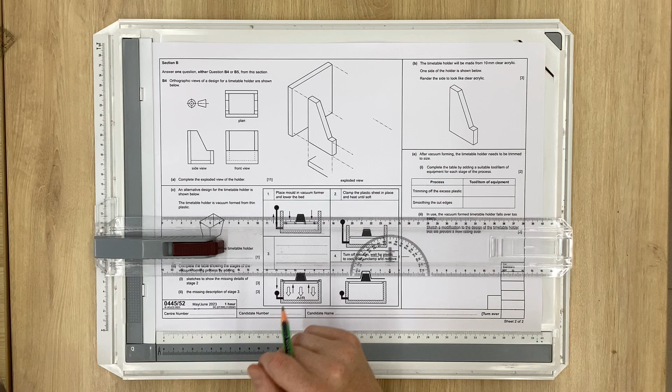The first thing I'm going to do, because it's isometric, is get my 60-30 set square, and I'm going to project all these lines across over. So I look at the base here, I see lots of construction lines, faintly first of all, going along, so each corner going over to the other side, and finally here.

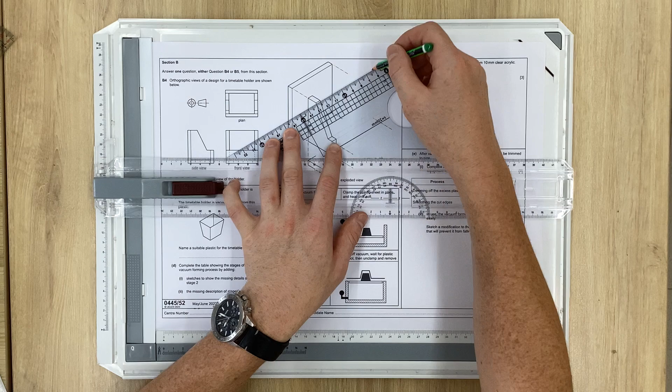With this now, I can line that first bit in. So we've got the bit there it comes to, that's the outside of there. So I can now work from these different bits to get the rest of it done.

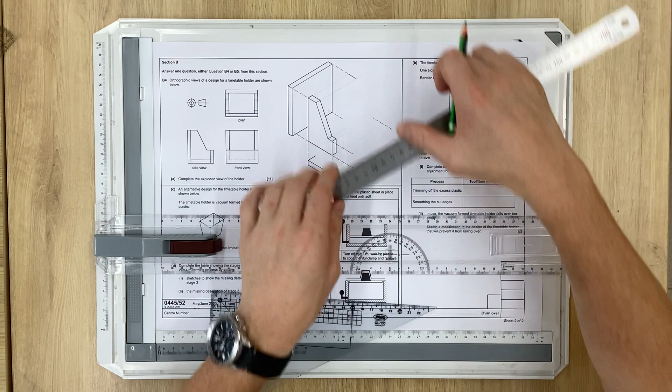First thing I'm going to do is measure this width bit over here, and this bit is 5mm thick. So I'm going to go 5 thick here, put a little mark, and then come down like that. So do the rest of them quite faint.

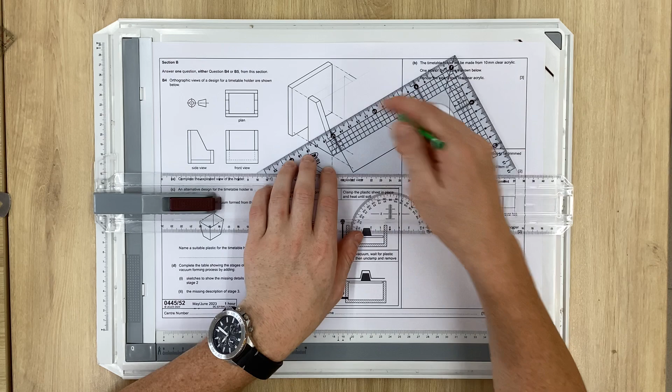From here now, I'm just going to go straight down. And I can project from here to see where that goes to, which is there. And this bit can then project forward. Just got that. So what we need to look at now is how far along this is.

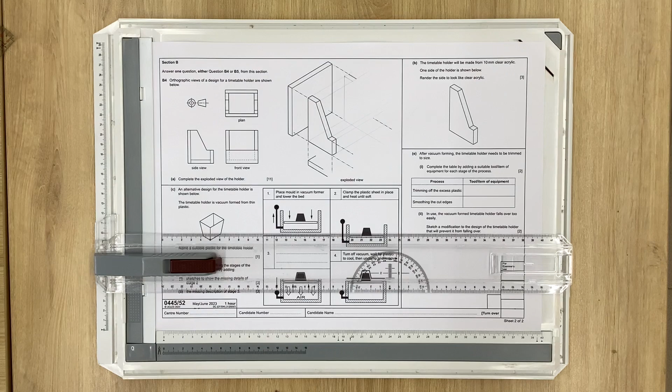We've got different bits of lines everywhere, but it's always easier. This is 30mm long, so I measure 30mm, goes to that point there, which matches that pair perfectly. So I can do my line up here, and that line matches there.

So this then goes to back, that's going to go along like that, and then this line's going to join to there. So I can have a look and see, but it's not at any angle, so I'm just going to join it straight with a ruler. So I join it like so.

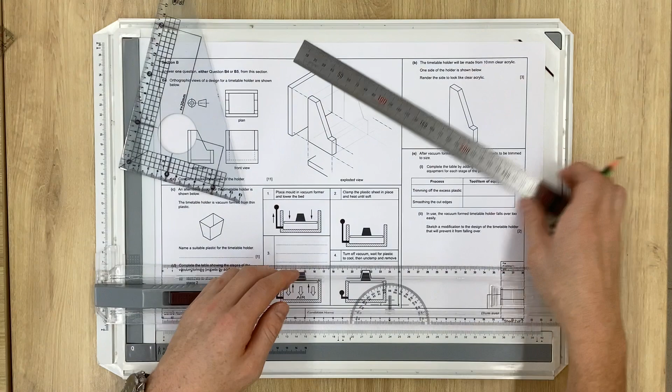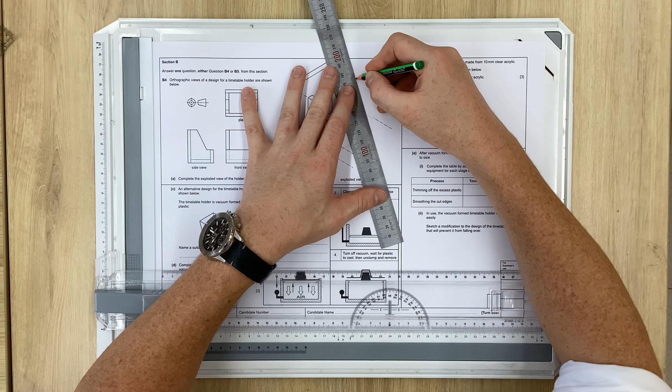We said this is 5mm wide, so I can do the same here, measure 5mm, then put a line up. So line up here, then I put my line along there, join this up to the top, like so. So that's my side view complete.

It's the same as that one. I'm not going to go line it in just yet, because I need to do the base part and we need to put that front view in as well.

So the next thing we're going to do is this base bit. So they've got it started for us, so I'm just going to extend these lines, there and there, and this along here.

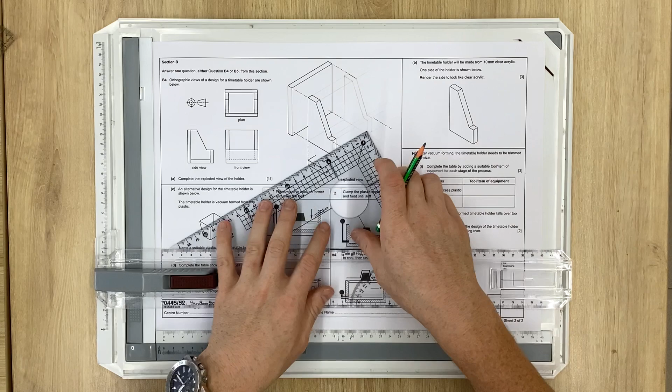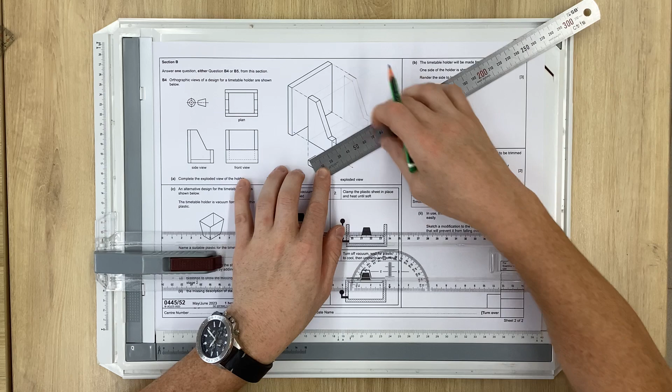With this now, I know that this is the same width as the back bit there, so the base is going to be the same width. So if we measure the width of it, the width is 50mm. So I'll measure 50mm here, put a mark, so then I can go along here.

So you can see the base part goes in between the front and the back. The front bit there, the back bit there, we've got that middle bit there. So the distance is going to be the same as this bit here, so it can get projected straight down.

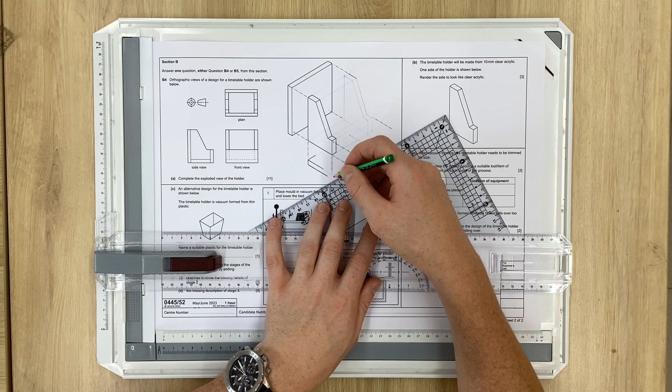With this, I'll project down like that to there, and I'll complete the top bit first of all. So that's going along to there, and the bottom bit project along, like so. So there is our base part, which is matched up with that.

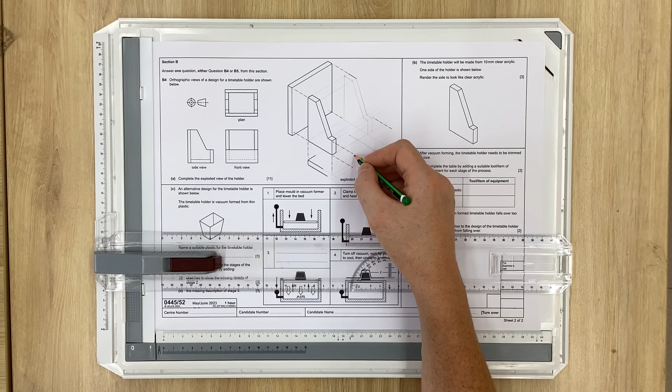The last thing to do before we line everything in is we need to do this little front panel here. This front panel is the same height as this bit plus the base bit. So we need to come off here, so you can see the lines coming already, so we can start that bit, but it doesn't go down to there, it's going to go down 5mm further.

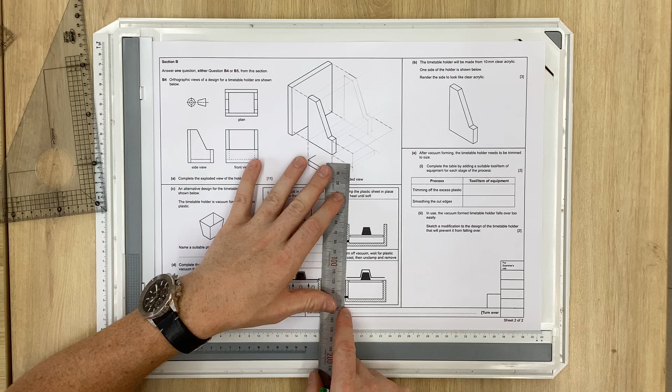First thing I'm going to do is on these bits, I'm going to put a line across, project it from there. Then I'm going to go down here, and like I say, it shows that bit plus the bit further, so that's extra 5mm. So with this, I measure another 5, which is there.

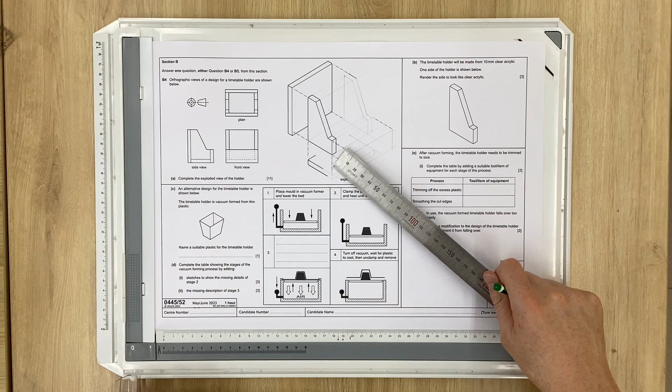So now we can go along here and project this part down here from that line, because that's projected from there. So we need to put on the thickness of it, which is 5mm. So I'll measure 5mm here, put a mark, and using the 60-30, I'll put a line across here, and finally a line down.

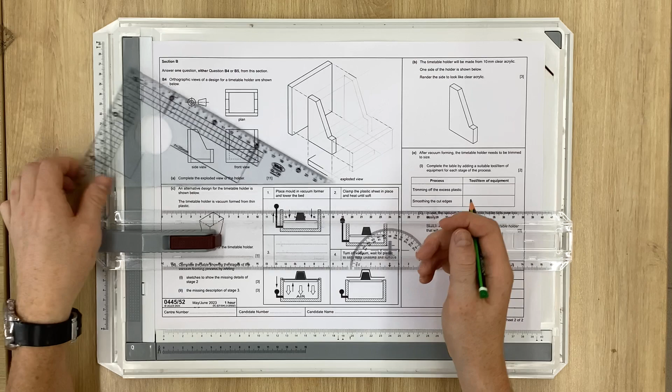I just missed that one a little bit there, put that bit there. So then we've got to line everything in. We've got everything drawn, but it's a bit tricky to see all the construction lines.

So the first thing you do is this front panel, because there's nothing in front of it, there's nothing on top of it, so I can go over this, line it in first of all. I'll quickly just do the vertical bits first of all, then I'll put the horizontal bits in.

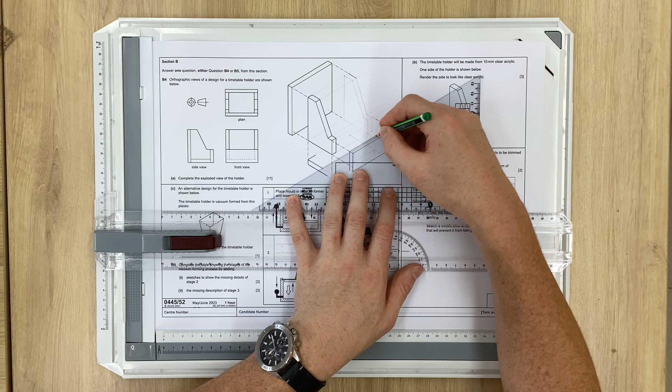So there, and flip around for that bit, and that bit. So that's that front panel done.

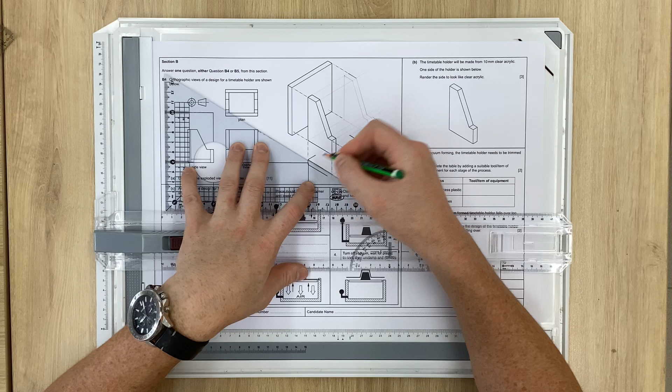You can see it clashes with this bit, so we're not going to see that. So I'm just going to line this bit in because that's completely separate. I'll start off here, that bit there. This part we can see all the way along, so I'm going to put that bit in, and the bottom bit, and flip it around. So this goes from here, stops on there, carries on like that, and then this bit stops at that front part and stops there. So I'll just line in that part there.

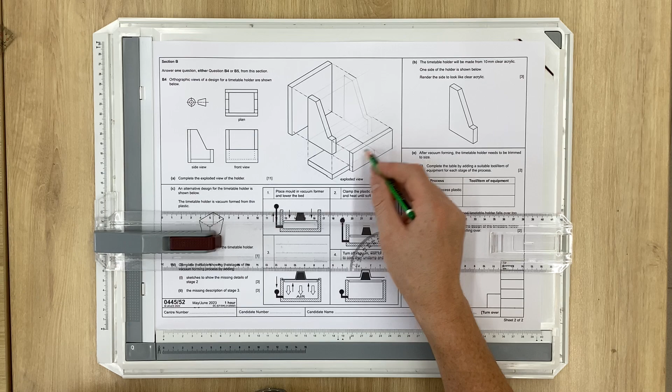So that is the base now drawn, so obviously we can't see that bit. So the final thing to do is line in that side piece. You can see nothing's blocking the view of it, so we can just go over the whole thing.

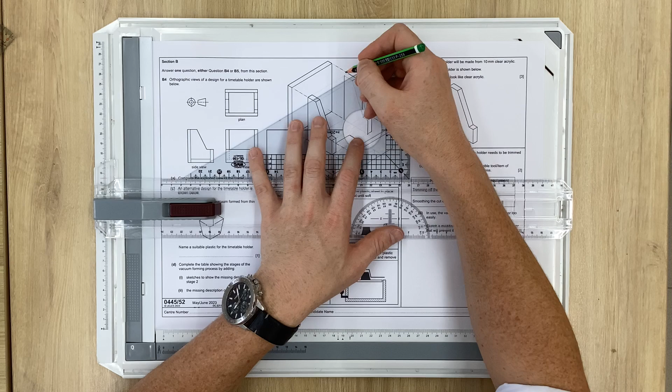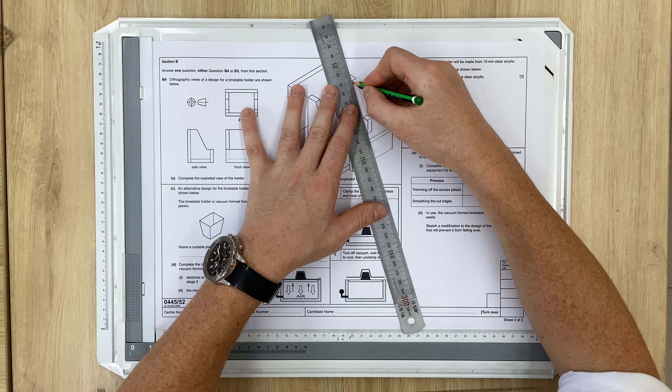Flip around, a couple lines here before we use the ruler for that angled part. Oops, that's over the top. So just need to get this line there and this line there. And there we have it, our exploded isometric view is complete.